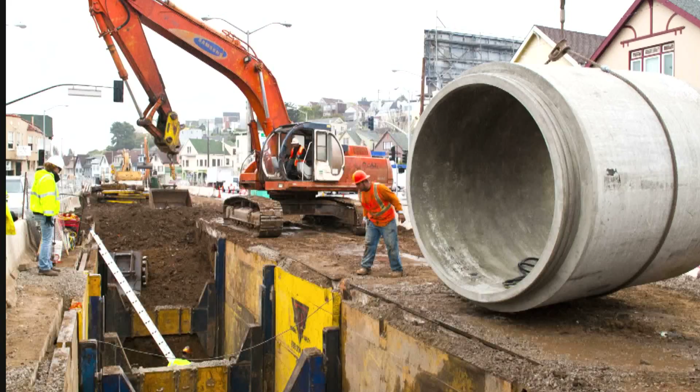In 2006, the PUC was planning and managing a record number of projects. The Public Utilities Commission is a very infrastructure-rich organization. We're out there rebuilding the water system. We've been working on power generation upcountry. We've been doing streetlights in the city. We're in the middle of looking at a brand new rebuild of our wastewater systems in San Francisco, and we haven't had a home that's been other than rental during all that time.

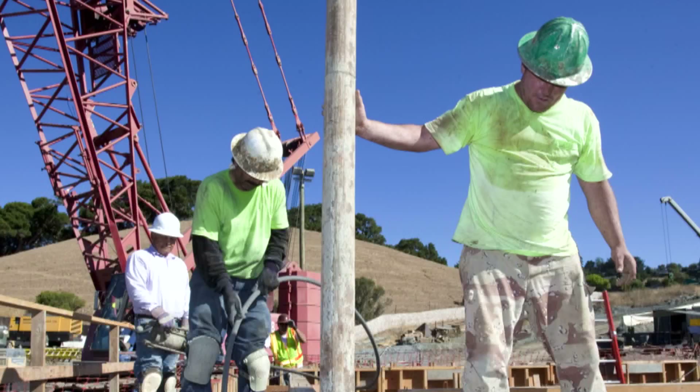With a staff of over 900 people, the PUC was leasing 2 office locations. And finally someone said, you know, this is such a great place for a building. If the PUC owned that building and we could make that the iconic, sustainable building the PUC represents, wouldn't that be a dramatic idea? So one of the major decisions we made was we wanted to make a statement with this building.

We wanted this building to be a LEED Platinum building, which very few buildings in San Francisco achieve. LEED stands for Leadership in Energy and Environmental Design. It takes a look at the way we think about the places where we live and work. I like to think of it as designing for human and environmental health. LEED addresses 5 categories that enhance the environment: indoor air quality, energy, water, materials and resources, and sustainable sites are the 5 categories for gaining credits under LEED.

You can go for silver, gold, or platinum certification. The city wanted to be silver LEED status. Maybe gold was a stretch. And people said, no, if we're going to be the sustainable organization that the PUC is, this has got to be the top of the line. It's got to be a LEED Platinum building. What does that mean to us? We run water, power, and sewer. So those are some of the biggest things involved in LEED Platinum.

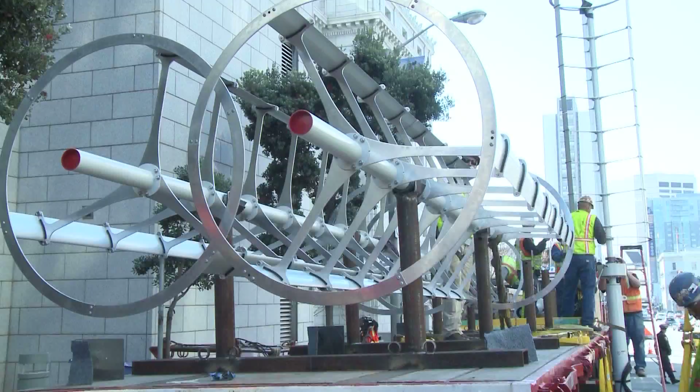Fortunately, the world suddenly had wind turbines, which they didn't have before. Our team, realizing that time had changed and realizing where the opportunities were today, scratched their heads one day and said, you know, what we started out as really something to control the wind was an asset that, when you combine today's technologies, becomes something entirely different.

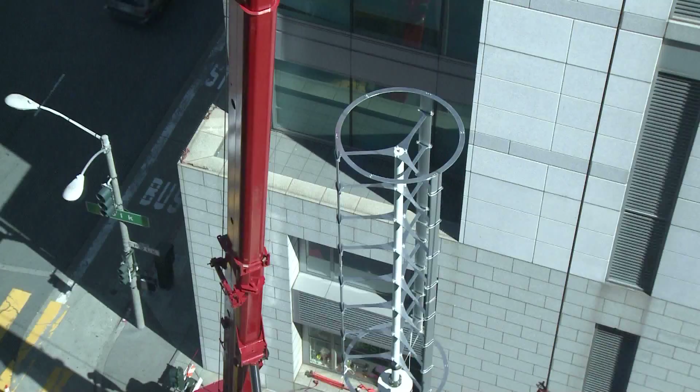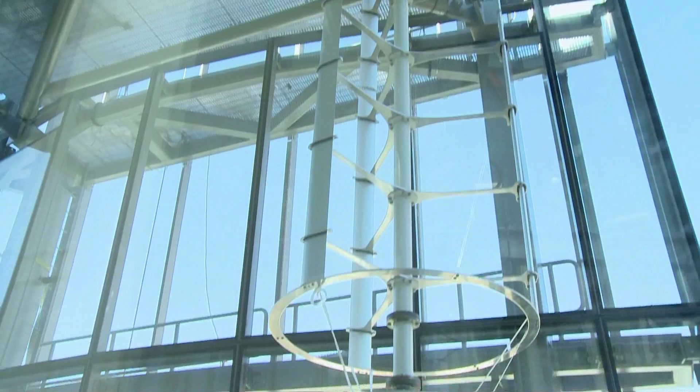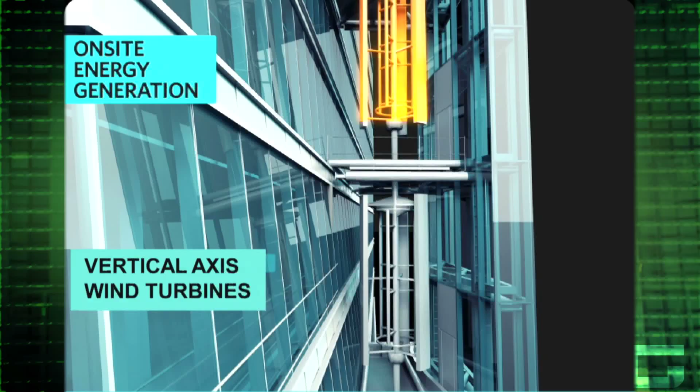Wind turbines in an urban environment is a relatively new concept. There are a few buildings in other major cities where they have installed wind turbines on the roof, but wind turbines on buildings aren't really perfected yet. The discussion was, do we do that or not? And the answer was, of course. If they're not perfect yet, we're building a building that's going to last 100 years, and in 100 years someone's going to perfect really efficient wind turbines. If these aren't right, we'll replace them. We have time to do that.

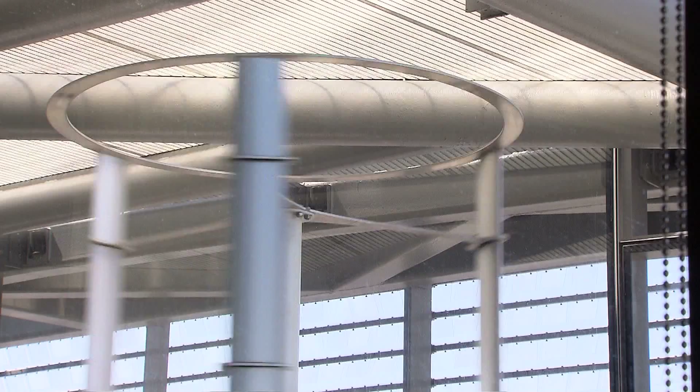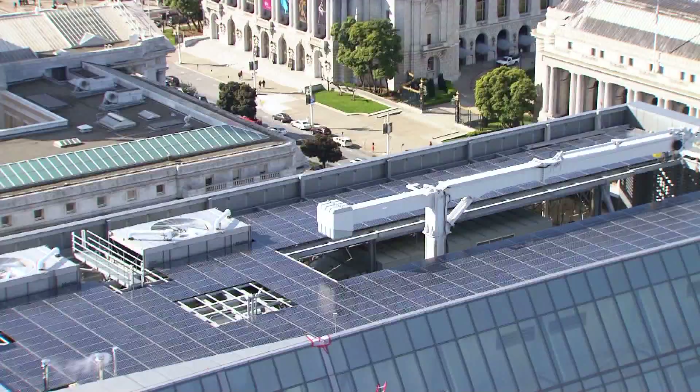The building has two types of renewable energy generation: wind turbines located on the north facade, and three different levels of photovoltaics. We have over 600 solar panels at three platforms on the building, and four building-integrated wind turbines. The wind turbines and solar panels produce 7% of the building's energy, and we're reducing energy use here by 32% over a typical office building.

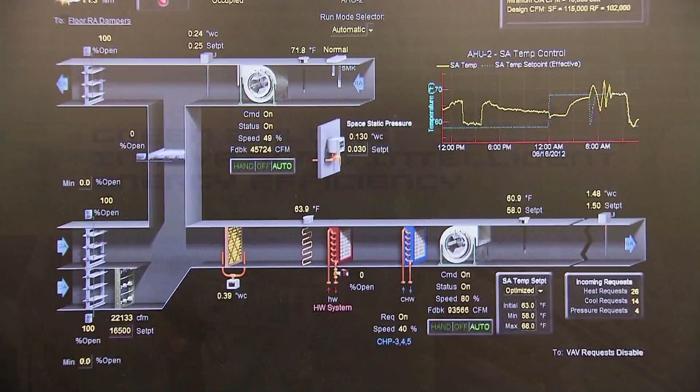The entire building is controlled by a complex computer system which monitors and adjusts air, heating, and lights, as well as indoor shades. The building is going to be a smart building with all integrated features.

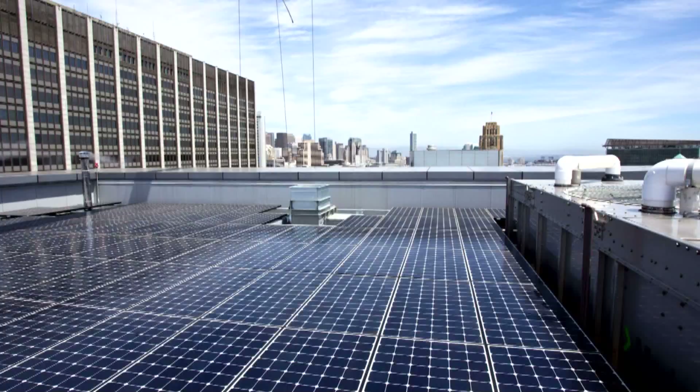It has a monitor on the roof that knows where the sun is. As it gets warmer or colder, it heats and cools the building. As it gets lighter, shades can go up or down to make sure you're not overusing heat or air conditioning, but as it gets darker, the shades go back up. The lights inside self-adjust depending on how close they are to the outside light source and how light or dark it is, so you're not using energy more than you need.

They also have occupancy sensors. If nobody's in a room, the lights turn off. So it's one thing to have different silos of sustainable features; it's another thing to have an integrated system of sustainability.

When you have a building that's LEED Platinum, there's a couple things that are really important, and one is daylight harvesting, where you harvest the daylight and have it penetrate the building so people have views and see sunlight, which means partitions and workstations are much lower so people can see. Human comfort combined with electric light reduction, all with the aim of creating a marvelous workplace that people want to come to, feel comfortable working in, and thrive at what they're doing—the daylighting strategy is a very important part of that equation.

One of the keys to this building is that we're maximizing the use of natural daylight to light the building. Here on our south facade, we have light shelves. These help to shade the floor, but also bounce light off the shelf into the interior of the floor, providing more daylight into the interior.

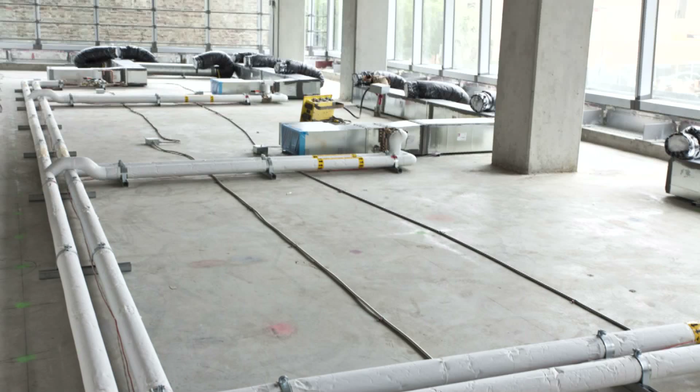This building also incorporates an underfloor system for delivery of heating and cooling. This, in conjunction with the high efficiency equipment we've installed, reduces the consumption of energy for heating and cooling by 51%.

We have Otis Gen 2 destination elevators here. Destination elevators save about 35 to 40% of electrical energy over a traditional elevator. These elevators save energy using a regenerative drive—when cars go up empty or down full of people, they generate electricity that goes back into the building grid. They also save energy by grouping people going to the same floor in the same cab.

The way they work is you have a shared elevator call button in the lobby. You indicate which floor you're going to, for instance floor 3, and it directs you to elevator C, so you go with people heading to the same floor. What's also interesting is inside the elevator cab there are no floor selection buttons, because you've already selected your floor in the lobby. This takes some getting used to, as we're all accustomed to choosing our floor inside the elevator cab.

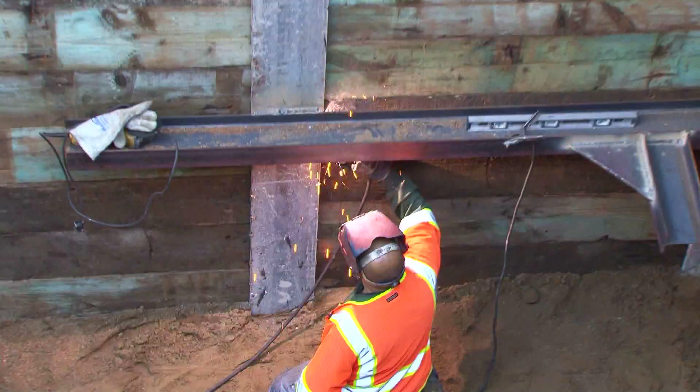Another precedent we set, which was a challenge for this building, was the permitting process for the living machine to use reclaimed water in an office building. I think we really broke ground for future use to be much more commonplace for the utilization of reclaimed water in office buildings.

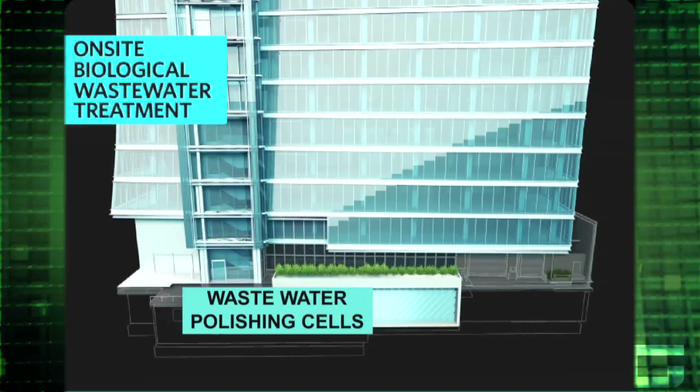This building uses 60% less water than a typical office building, achieved by using rainwater for landscaping and treating wastewater on site for reuse in the building's toilets. The living machine is an ecological wastewater treatment system for water reuse—it accelerates what happens naturally in nature, this biomimicry of what happens in tidal estuaries.

The tide brings in water and nutrients to the microbes, the tide goes out, the nutrients stick to the slime, the biofilm at the coast, on the rocks, and oxygen is delivered in the air. The microbes do the rest of the process, chewing up those nutrients in the water and producing nitrogen and carbon dioxide. So we're mimicking that in an engineered system, creating 12 to 16 tides per day.

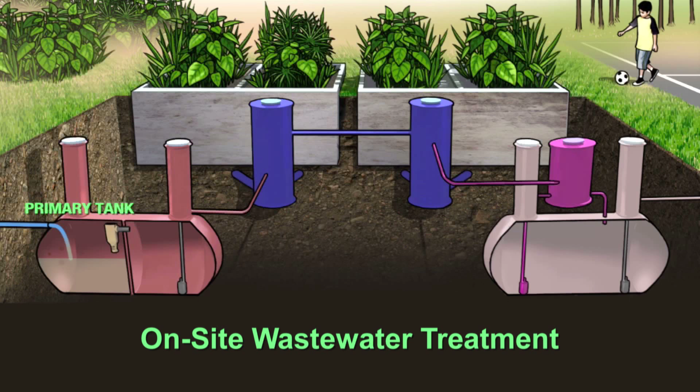The wastewater for our building begins its journey by traveling to our primary tank, beneath these fairly normal looking manholes. Beneath these manholes is a 10,000 gallon primary tank, with 2 chambers: the trash chamber, which filters out all the trash and plastics, and the settling chamber, where the organic solids settle out, just as in normal wastewater treatment processes.

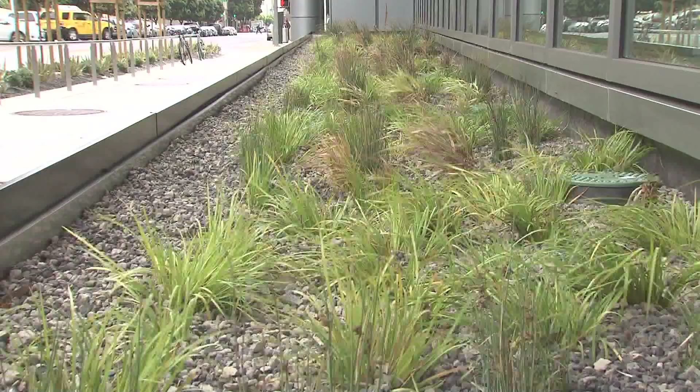The water then flows through an equalization tank, a recirculation tank, and then on to tidal flow wetlands cell 1A. Although these wetland cells look to be only 3 or 4 feet deep, they're actually 8 feet deep below this concrete sidewalk. The water repeatedly cycles into the cell from the bottom up, meeting the microbes placed in there to treat the wastewater. These microbes flourish feeding off the organics found in the wastewater.

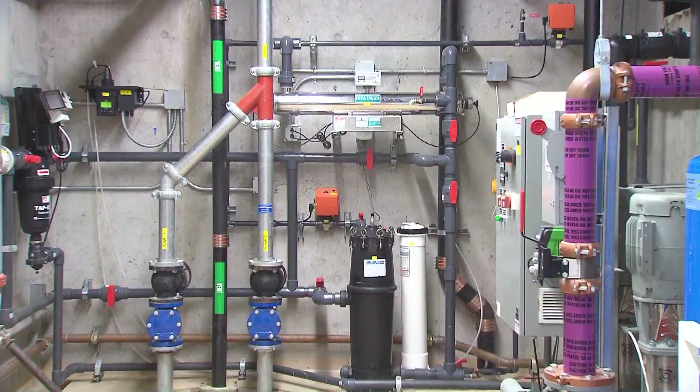After multiple cycles, most of the wastewater treatment has already occurred, and the water flows to the vertical polishing wetland cells around the corner on Polk Street. The final polishing cell 2C is located half outside on Polk Street and half inside in the building lobby. After the final polishing, the water flows to the disinfection room in the basement of the building.

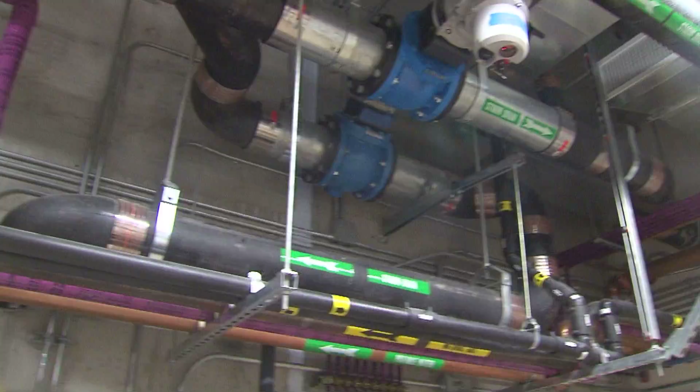There, the water goes through two disinfection processes: first, ultraviolet light, and second, a dosing of chlorine. The treated water is stored in a 5,000-gallon reclaimed water tank, where it is pumped throughout the building for toilet flushing purposes. The treatment cycle is complete, and the water is reused again and again.

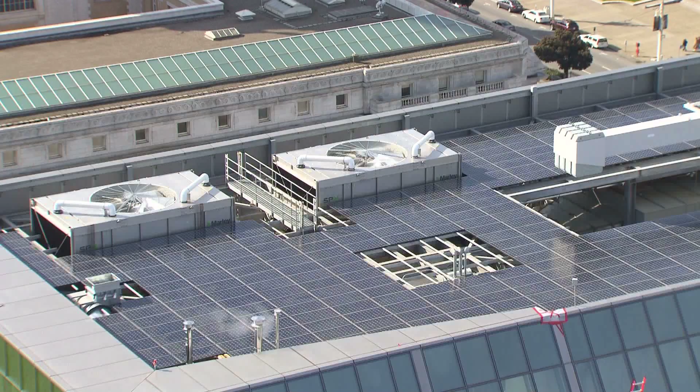This new building also features a rainwater harvesting system. Rainwater is captured from the building's roof and the children's play area along the side of the building, and sent down to our disinfection room where there is a 25,000-gallon cistern. The rainwater receives minor treatment and then is used to irrigate the building's trees and landscaping.

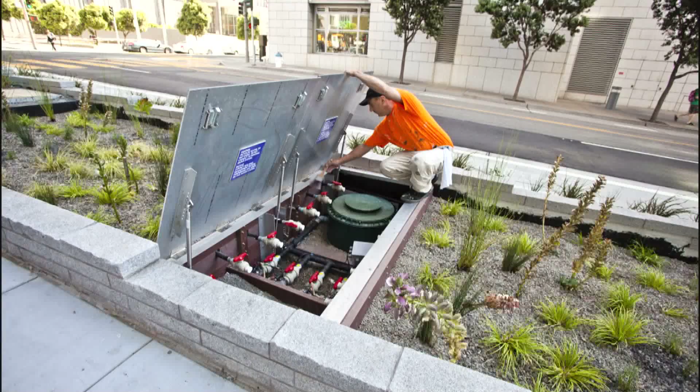When we're reusing water that we already have on site, we're not purchasing new water, and we're also not putting sewage down into the sewer system, which costs money. For the PUC project, this is a demonstration project of 5,000 gallons a day, but it's the beginning of understanding and feeling comfortable with this technology that can be scaled up into eco-districts and community scale systems, campus type systems, where the numbers are much higher, 50,000, 100,000, 200,000 gallons a day. Imagine the savings, not purchasing fresh water and not using the sewer and being charged appropriately.

This wastewater processing and reuse technology is cutting edge. Although it's been successfully implemented in other cities, it will be one of the first such installations in an urban office building. Here is a city agency that treats wastewater, but sends no wastewater to the treatment facility. That says a lot. Instead of 12 gallons per day, occupants are using 5 gallons per day. With the building officing 1,000 people, that turns out to save over 2.7 million gallons a year.

The Public Utilities Commission runs your water, power, and sewer services for San Francisco. We can't afford to be out of business after an earthquake. So when we were thinking about building a building, that building is going to hold our operations center and our emergency operations center for things like earthquakes. That building had to be immediately occupiable.

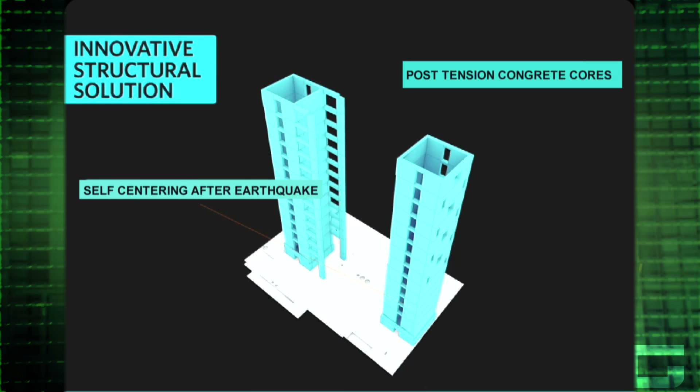Great, but we could do better than that. So this new technology that we ended up using was a concrete building with straps, basically, that go through the interior of the building, allowing the building to turn or twist as part of an earthquake, but it corrects itself. In the cores for the SFPUC building, we've incorporated, in addition to the steel embedded in the monolithic concrete, specialized high-strength cables.

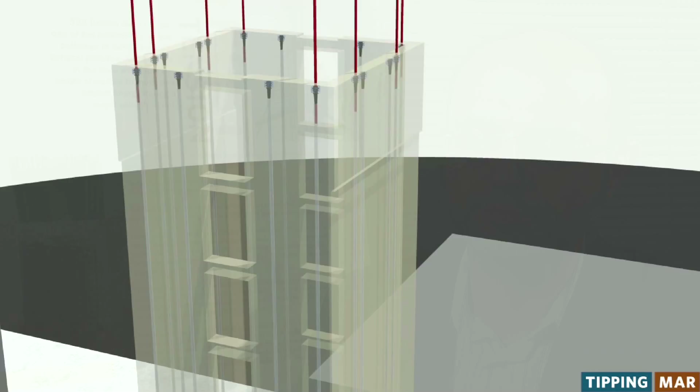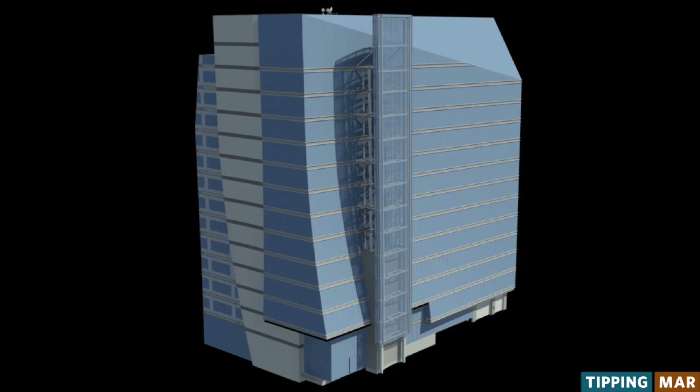These cables are not bonded to the surrounding concrete, but are threaded through essentially hollow conduits in the cast concrete. When those cables are threaded, they are anchored, and there's actively millions of pounds of force pressing down and forcing that concrete wall into a permanent state of compression. That's the characteristic which allows the building to shake, absorb energy from the earthquake, deform, and also come back to its original geometry. What that meant was that the building would be functional — it simply wouldn't have to be abandoned and fixed.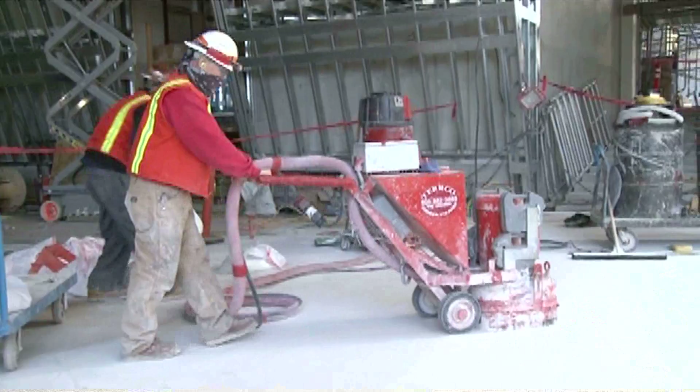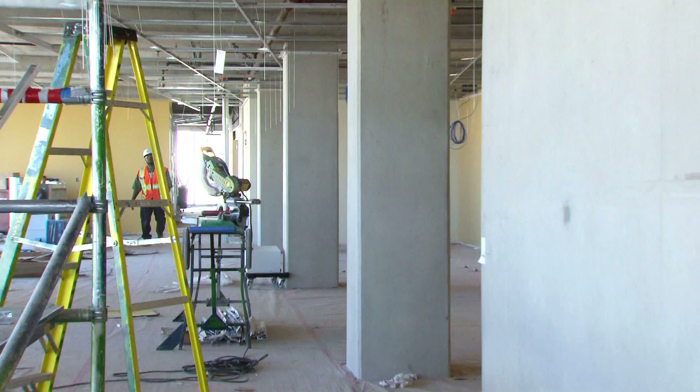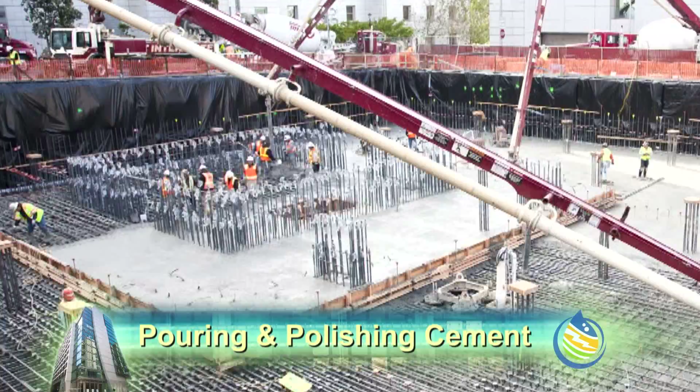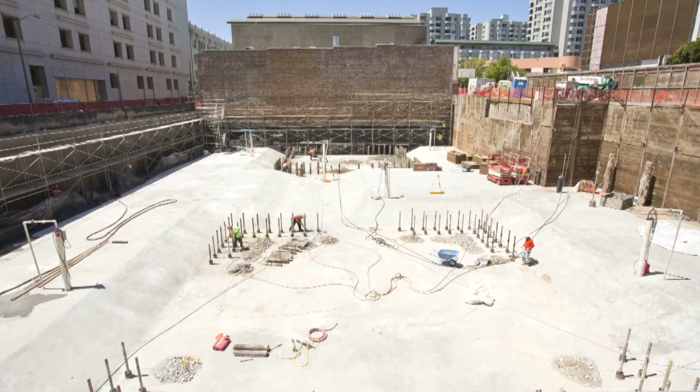We have probably the greenest specification for concrete ever developed for a project with a really innovative structural system. One of the things evident from the research is that concrete is responsible for a significant amount of CO2 production worldwide. We developed a way to incorporate replacement materials such as slag and fly ash to supplement the Portland cement, allowing a big reduction in carbon emissions. Concrete for the building has a 70% replacement value with recycled materials, fly ash and slag, that would otherwise go to waste, reducing our carbon footprint in half.

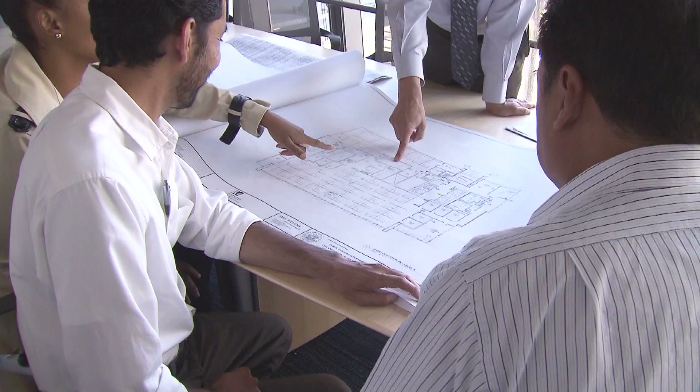The way we often do buildings or projects in the city is we go out and do a low bid, somebody bids on something, we have to do everything that's spec'd out completely, and then everything else after that's a horrible change order process, and it's very difficult. Traditionally, we use a design, bid, build type of delivery method.

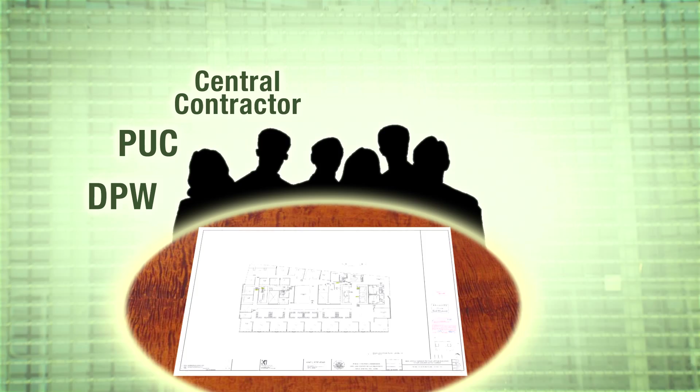In this one, we did a construction manager GC, which means we bring the contractor on board as we design, and they participate in the design. It brings a lot of collaboration. The Department of Public Works decided to try a more team-oriented, best value approach with this project, and they looked to us to come on board as a team member and work with them. That meant the contractor, along with key subcontractors such as electrical, mechanical, and plumbing systems, would always be reviewed and looked at for constructability, cost constraints, and scheduling.

It was a risk for the city. It was a change for the city. It was something very, very different. We met all of our project parameters, the budget, the schedule. We love this project. It's a fantastic example of what can happen when you take a risk, do something differently, and work together—you get a great result.

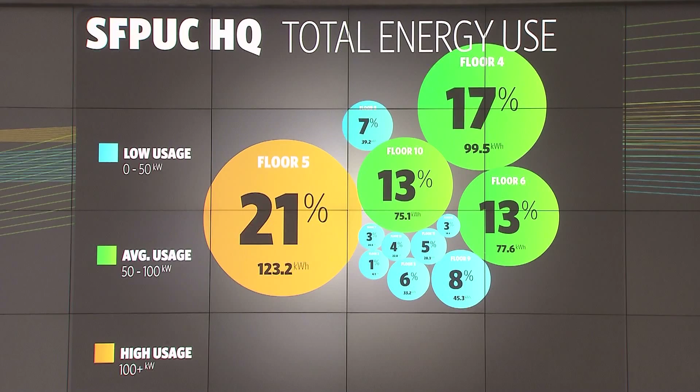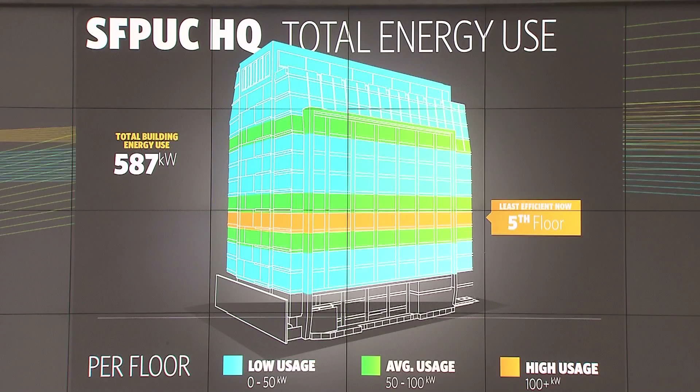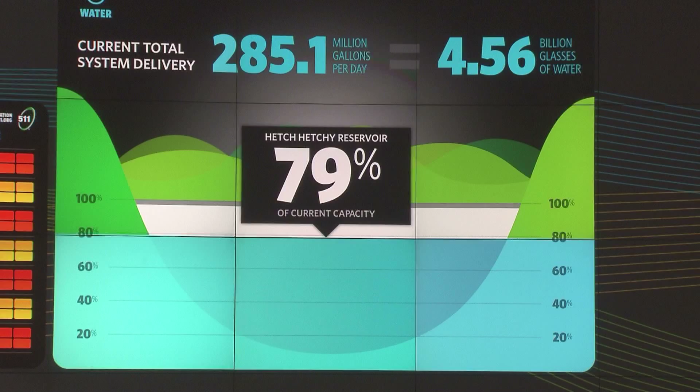The center section is dedicated to water, wastewater, and power. We have live information showing how much wastewater has been treated so far from the night before. There's also Twitter feeds with current news and information, and BART information—when's the next BART leaving, when's the next train departing. And there is weather at Hetch Hetchy and also weather in San Francisco.

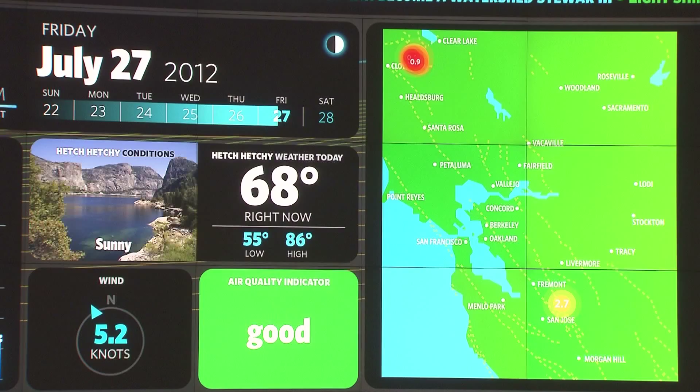The digital arts wall is comprised of 54 feet of 160 high-definition monitors with 3D motion detection that allows you to approach the wall and look at the content in front of you, which is a beautiful artistic narrative. As you move towards it, it activates deeper content that comes up.

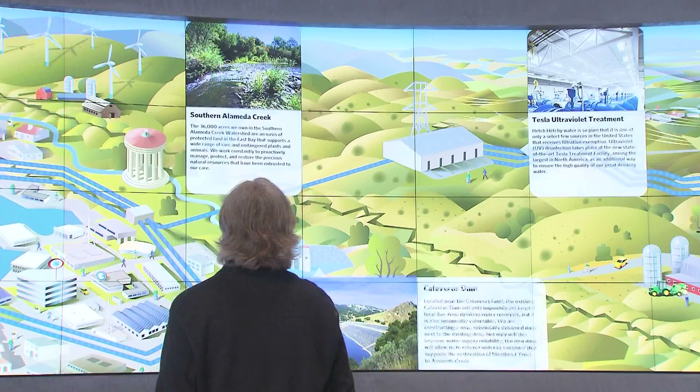This is one of the main applications we developed with the communications team at the PUC, called Snowfall to Outfall. It's about the water cycle—how the water comes down from the snow in Yosemite, melts into the reservoir, then gets treated, produces power, comes all the way down to the city, and then gets discharged as clean effluent once it leaves the bay.

We developed a motion tracking system with 4 cameras on the ceilings here, which detects people when they approach the wall and presents information pop-ups. So you can enjoy it from a distance as a landscape, but once you get up close, there's another level of information that's educational about the system.

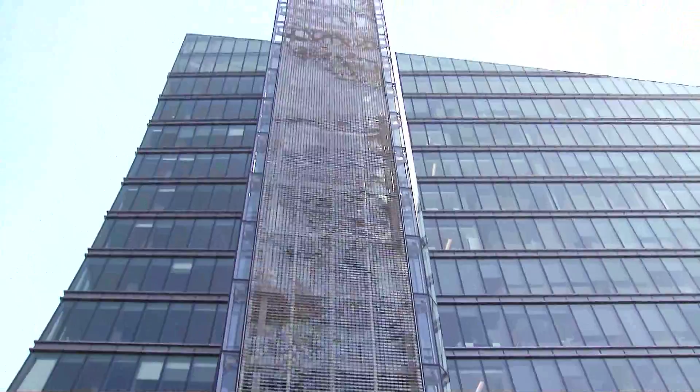Firefly, by Sebastopol artist Ned Kahn, is an art installation which rises straight from the Golden Gate Avenue sidewalk to the top of the building. The Firefly wall will be made of 5x5 polycarbonate plates that move with the wind and show a wave effect in the daytime. When they swing back and forth and hit the fulcrum, they will also set off an LED light in the color of a firefly.

So at nighttime, people in the northern part of San Francisco can see the side of our building, about 20 feet wide and 10 stories high, flickering on and off like fireflies. It will be so energy efficient that if all those lights were on, it would be the equivalent of a 40-watt bulb.

And I saw the new piece of artwork going all the way down the side of the building, which looks like incredible wind ripples on a pond. And I thought, oh my God, how incredible, how wonderful. Inside the building we will have water walls in the main staircase, and the water will be dripping through the side of the wall. You'll be able to hear it, you'll be able to see it.

We put out a call to San Francisco artists and San Francisco galleries and said, we want a building that is a place people want to come to work in and to visit. We're now going to be buying art from between 80 and 100 local artists in San Francisco, and the Arts Commission will be hanging that art over the next couple of months for the building.

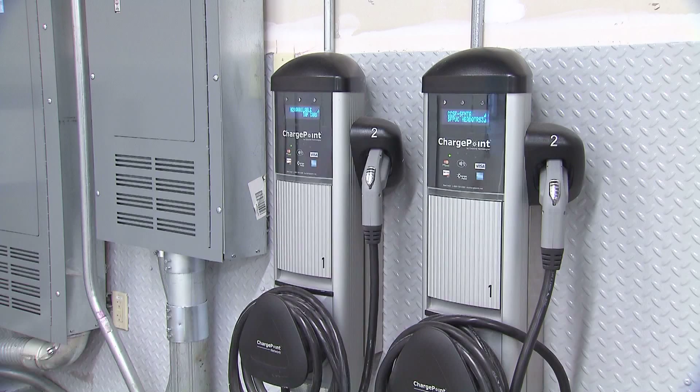We looked at various ways that we could be creative in promoting alternative transportation. We did this by providing bike racks and showers in the building, reducing the number of parking spaces to 2, and providing electrical charging stations for alternative vehicles.

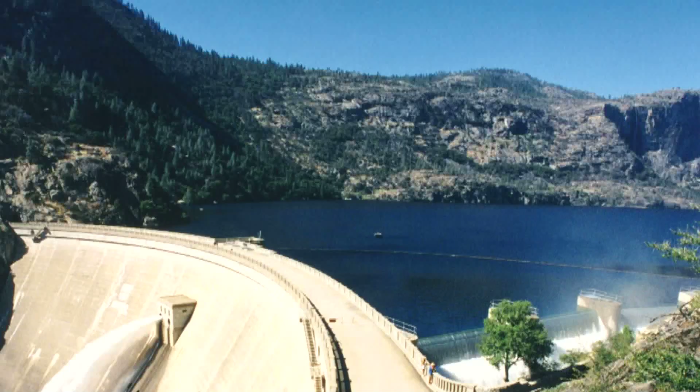And so it's time for us to have a home, and it's time for you to have a home that all of us can be proud of. We couldn't do this without everybody working together on one goal, which is let's build something that reflects the honor of Hetch Hetchy, the honor of the greatest engineering feats, reflects what our PUC does for our public, and for generations to come, it will educate everybody.

I'm really proud that one of the greenest and most sustainable buildings in North America is here right in District 6. The wind turbines, the solar power, the living machines, recycled water that Ed and the mayor have already spoken to. And what's also amazing about this building is that it's not just internal, you can actually see it on the outside. So when people are walking around the city, they can see the green and environmental aspects.

What better way to show that the PUC cares about the environment, and the PUC is going to show everyone else you can do this too, and you can do it in a way that makes sense, that's affordable, and that is better for the environment.

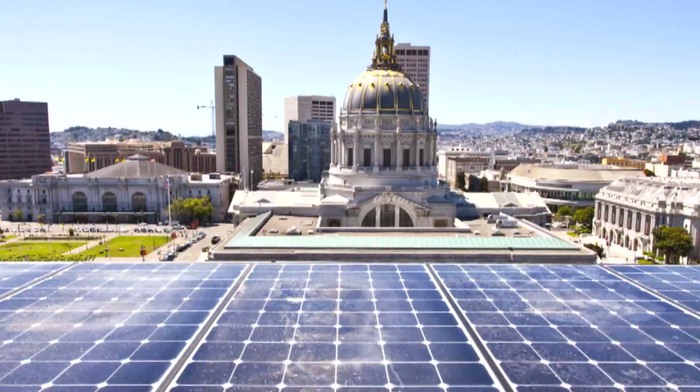This is the most energy efficient government building in the United States today, if not the world. It is an example that the entire United States can look to and say, that's what we need to do to save our city hundreds of millions of dollars in energy consumption a year, and set an example to everybody of how to save energy, to be green, to be sustainable, to be responsible. The city is leading the way.

It will be immediately recognizable and iconic from various parts of the city, or even when you see a picture of it, you'll say, that's the SFPUC building. My God, isn't that a wonderful building? Didn't they do it right?